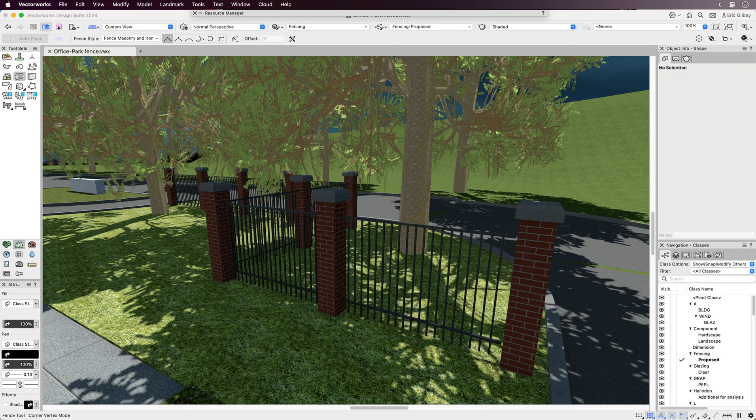If you incorporate fencing in your design projects, then the Fence Tools automated workflow is developed for you to efficiently design pre-configured and custom fences in both 2D and 3D, and it's suited for any industry supported by Vectorworks' Design Suite products. One of the first things you'll note about the Fence Tools intuitive interface is how similar it is to other smart object tools.

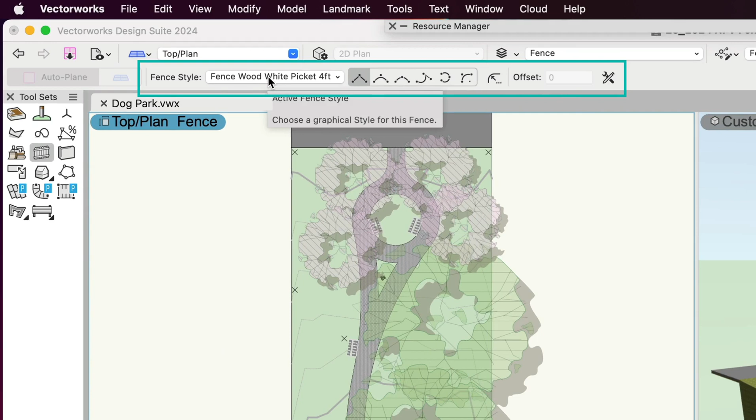The mode bar provides immediate access to available pre-configured fence styles through the resource selector, the familiar polyline placement modes, and the Fence Tools preferences to adjust the tool's settings. Let's review a few major features we know you'll appreciate. First, fence objects can be placed in either 2D or 3D working environments and be represented dynamically in both.

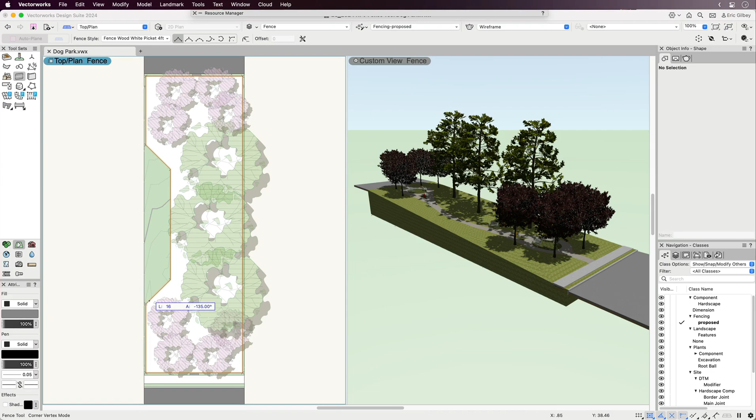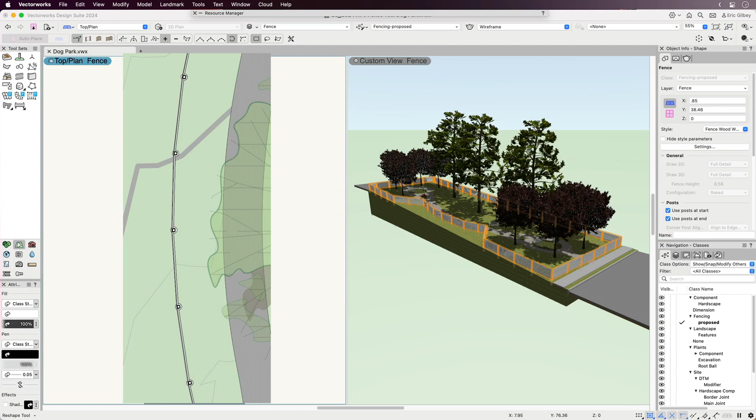Next, these objects are surface aware, which means they'll automatically follow site model surfaces, or with gravity mode, they can follow surfaces of any 3D object including hardscapes, landscape areas, slabs, and walls. And additionally, fence objects automatically facet to the designated post spacing when drawn in a curved path, which is a tremendous time-saving feature.

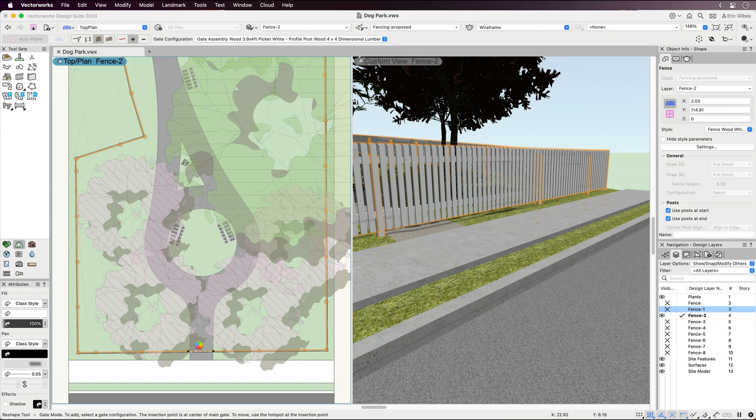Once you have initially placed your fence system, flexibly adjust or customize it using the familiar Reshape tool. For example, in order to accommodate an entryway, you can add, remove, and adjust the position of the posts to make way for a gate. Then, simply add a gate by selecting the gate mode and choose where the gate should go, making it easy to place as many gates wherever needed.

As we start with the General tab, you'll note the opportunity to change the 2D and 3D levels of detail. This can be very useful in moving from schematic design to design development and construction document phases, or to present your proposed fence design with as much detail as you prefer. Another general setting is the overall fence configuration, which can quickly switch to be raked or stepped.

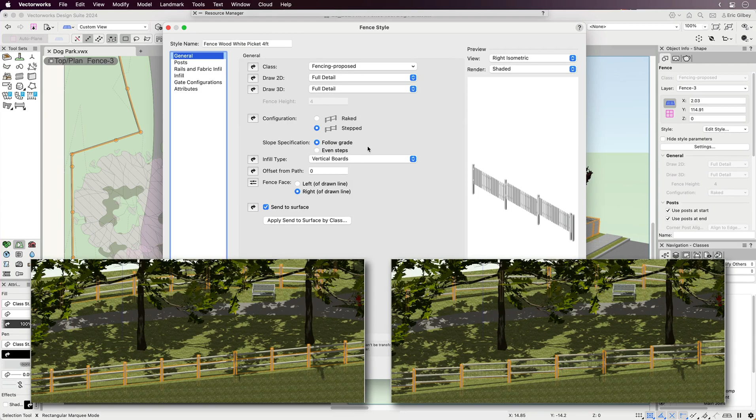As we move on to the post settings, you'll note the ability to accurately adjust your fence installation for each project. For example, if you know the panel span is meant to be shorter than the default, you can quickly change this, as well as modifications to the post height above ground and depth below ground. As you would expect, this automatically changes the overall post length, reducing errors found in the material order once installation begins. Specifying the footer for every post is as easy as picking its shape and size.

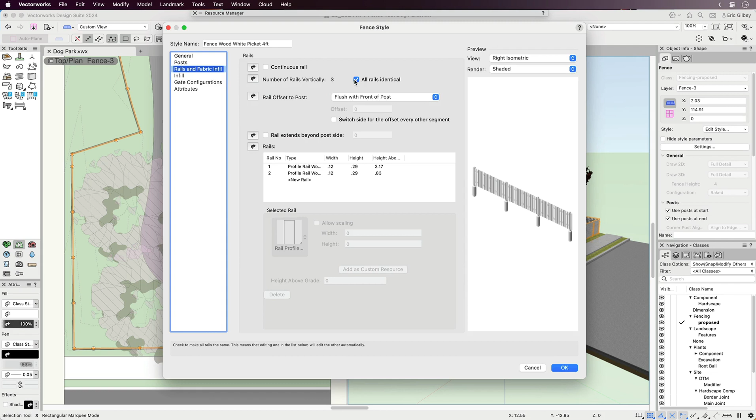When framing fences, rails are critical to its longevity, and since conditions can vary, so should the railing specifications. Fortunately, changing the number of rails, their type, and their profile dimensions are easy in this dialog. When you choose pre-configured fence styles, often the infill settings are already set, reducing the time it takes to create the infill panels. But when you do need to change or create a new infill, the settings are straightforward. Also, you can specify if the infill should be continuous or only between posts with a simple check or uncheck.

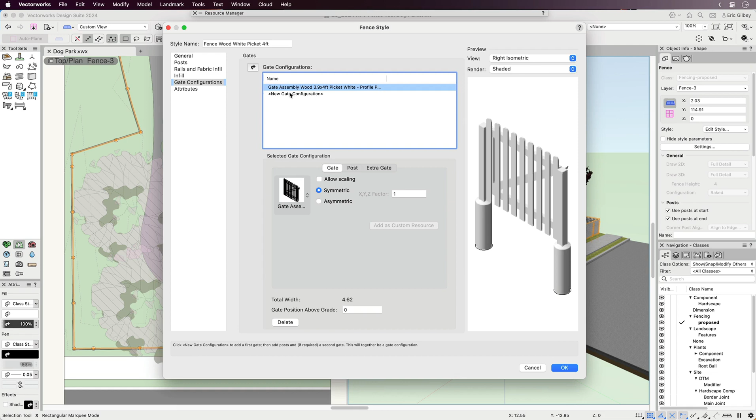We've already seen how gates are added into the fence runs, but the determination of what gate and its related settings are made in the gate configuration part of the fence settings. The best location to customize fence materials is through the Attributes dialog within the fence settings. Here you have the opportunity to use class settings for each fence part or use assigned material settings. If your eventual goal is to report not only the parts but the materials as well, it will be worth the short time spent assigning these attributes.

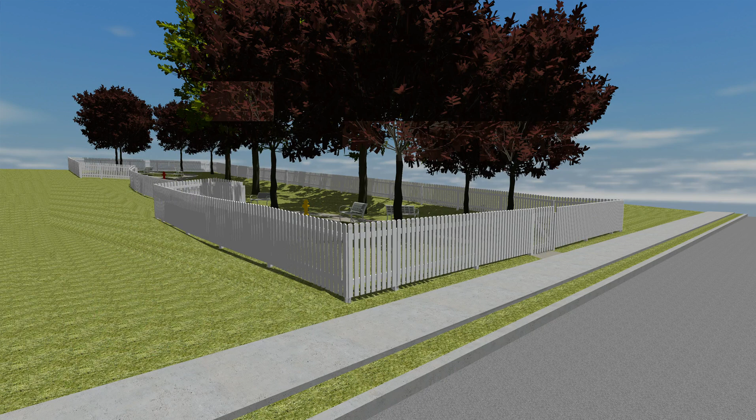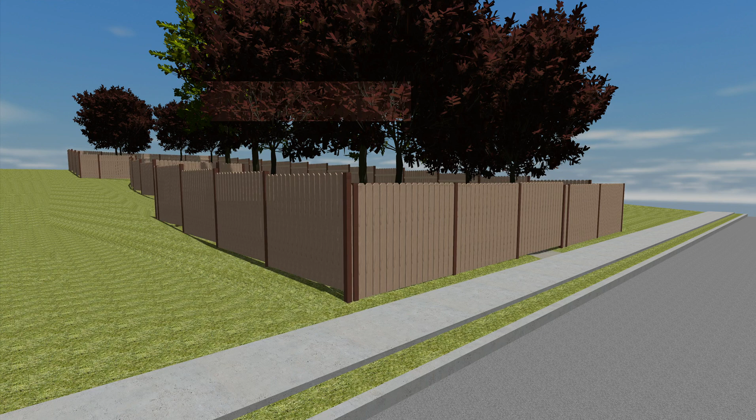As you have seen, the Fence Tools automated workflow provides for simplified and detailed representations, supports integrated posts and gates, and offers terrain-conforming options like raked or stepped. The Fence Tool will save you significant time while designing in 2D and 3D and still allow for accurate material reporting, reducing the chance for errors in material specifications.